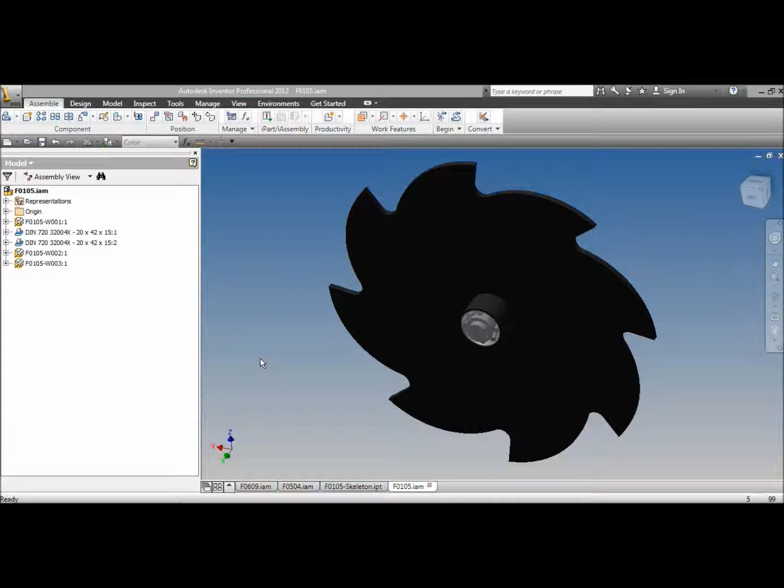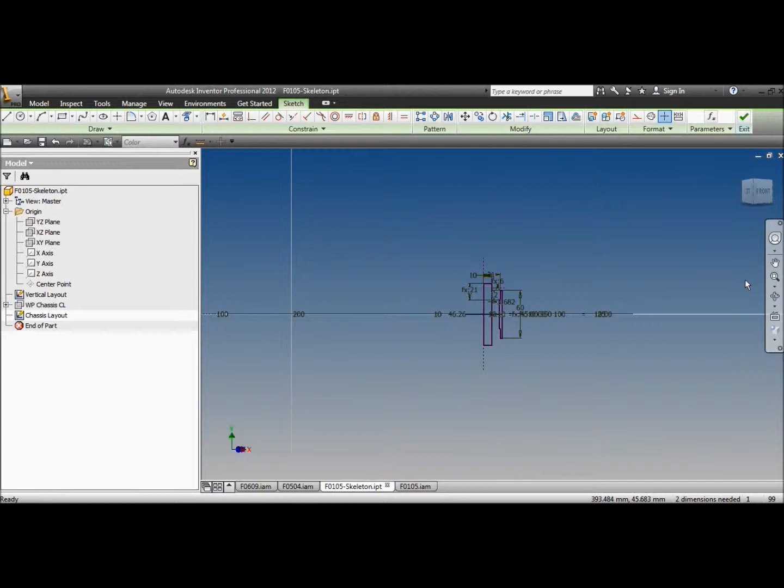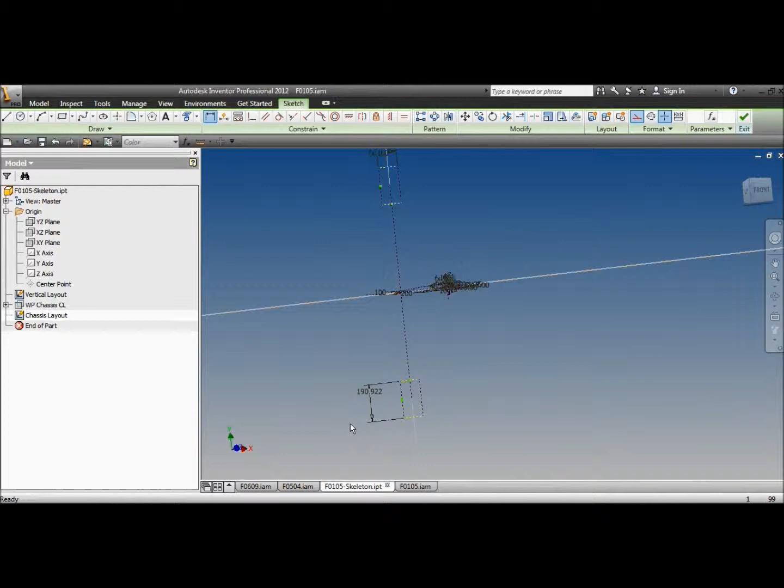There we go. Oh, let's make it 400 wide for the moment, just to see what happens. Right. 400 wide. What do I do next? I guess I draw some axles for the wheels.

Thinking, I'm thinking. Give me a minute. It's too early in the morning.

Yeah, that's an axle. Make those collinear so they're the same. Make the lengths the same. I use 12mm axles for the main wheels, because that's the center of the wheel. How far does that go through there? I've forgotten.

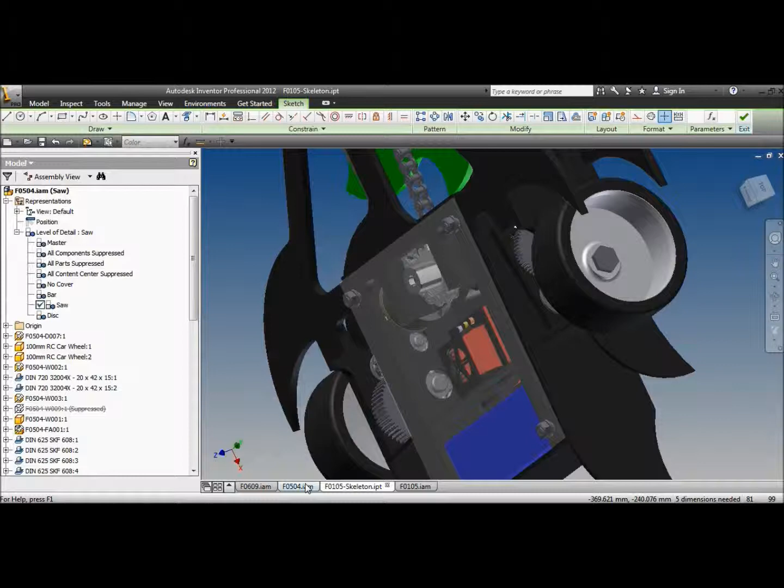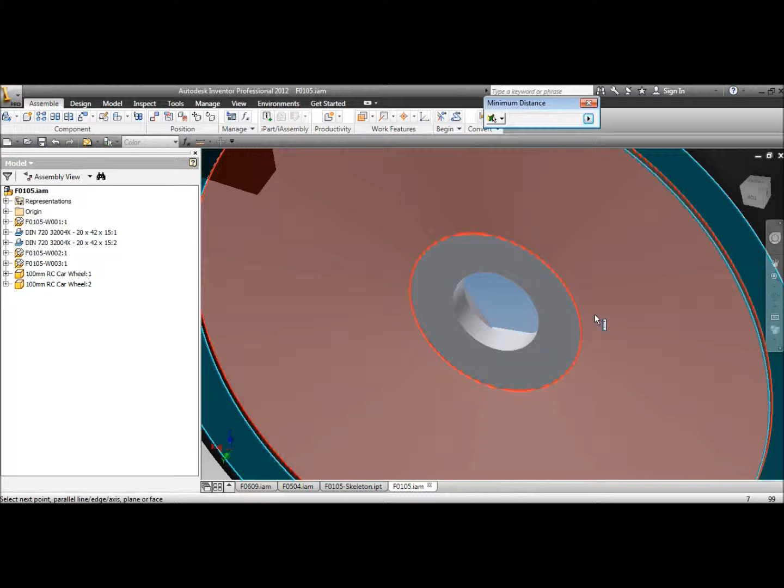Let's open up a wheel. Well, let's copy it into the model. Copy some wheels into our assembly. Paste. Yeah, whatever. Now the distance from the inside of the wheel to the inside of the hex is 8.5mm.

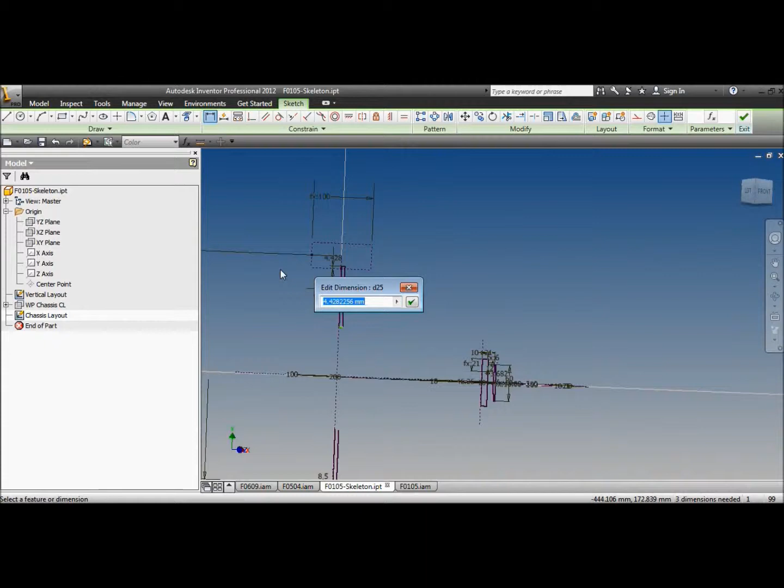I probably should set that as parameters so I stop doing it the hard way. But I don't think I will. I'll just keep doing it the hard way. I'm too lazy this morning. 8.5. So means from there forward in the construction line, how much wood on the other side? There forward on the construction line, that's the outside of the plate.

Just a minute, my leg's itchy, I've got to scratch my leg. Just to make this video more interesting.

There we go. Anyway, from there to there, put 3mm clearance between the wheel and the outside of the plate. And then here, just draw some random lines. That's the inside of the plate, which is primary plate thickness. There we go.

And then we have another plate over on the other side. We'll do it the same way we did over there. Make that line there equal to that line so they're both primary plate thickness thick. We'll make the axle stick out 3mm beyond, just for the fun of it.

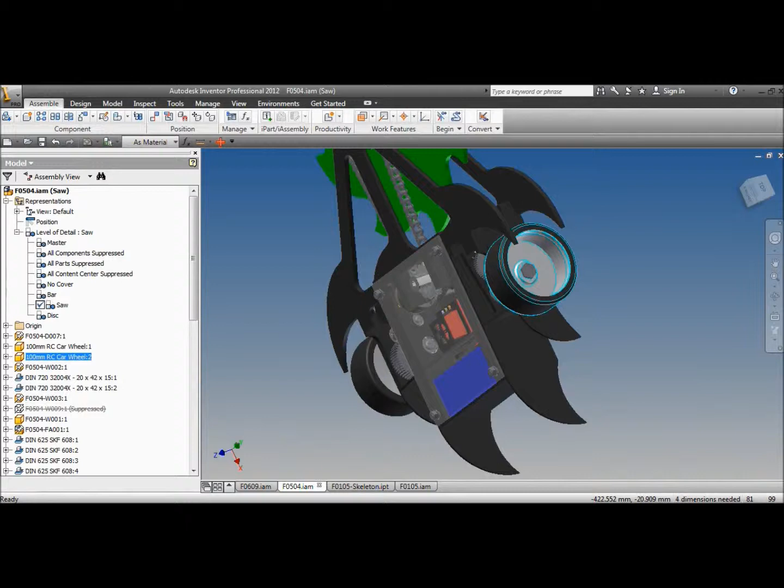Now the distance between these two plates is the width of the gears. So how big are my gears? We've got to figure out my gears. Now we could just measure them from here and use the same gears. Or there's the internet. Hello internet. This is the website I was looking at buying gears from. So if I just select a random one.

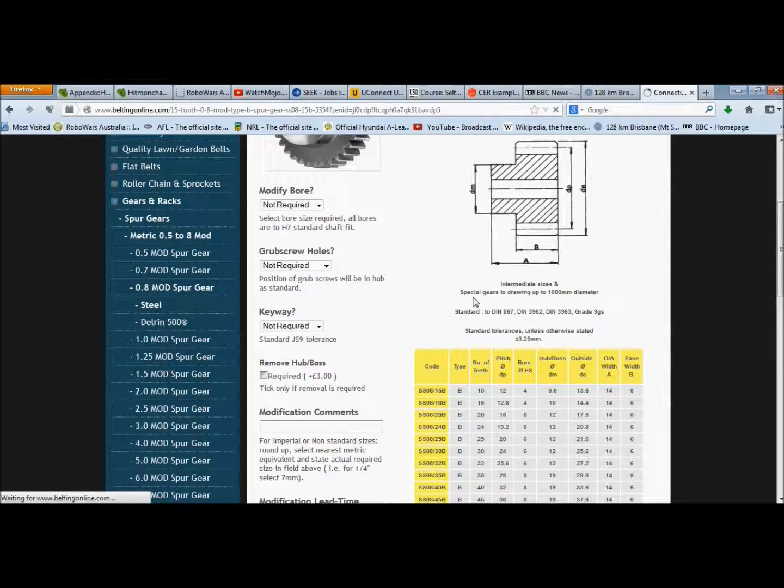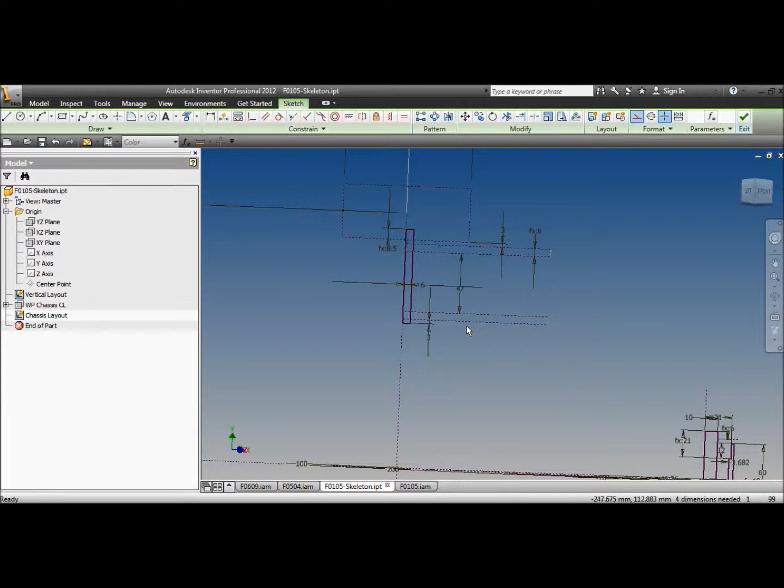This is a mod 0.8 gear. They say that their mod 0.8 gears are 14mm wide with a face width of 6mm. And their mod 1 gears, steel gears, are 25mm wide. Okay, go to Inventor, back to my sketch, this dimension was 16 plus 25 plus, we'll put 3 millimeters on each side of the gears. 47 millimeters. A bit bigger than what I had before. Oh well.

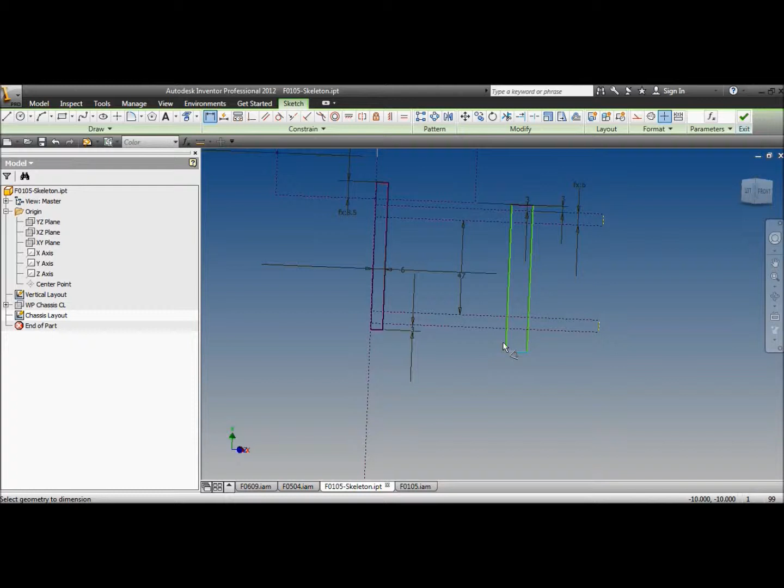So what we do now is we need another axle for the front gears. So we'll do another rectangle, and we'll do one over here. Make the axle stick 3 millimeters wide and 3 millimeters wide on this side as well. And the axle has a diameter of 8 millimeters. And from center to center, we'll have to figure out what gear reduction I'm using.

Now the overall gear reduction is 10 to 1. So we need 2-stage gear reduction. 10 to 1 is 4 to 1 and 2.5 to 1. We'll make the first stage 4 to 1 with the mod 0.8 gears, and the second stage 2.5 to 1 with the mod 1 gears. So for a 2.5 to 1, I'm just going to copy this. What gears should I use? 2.5 to 1.

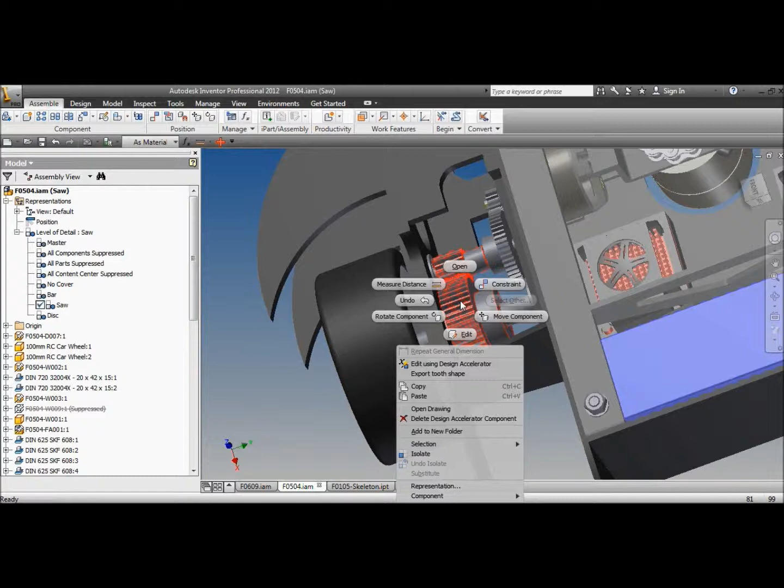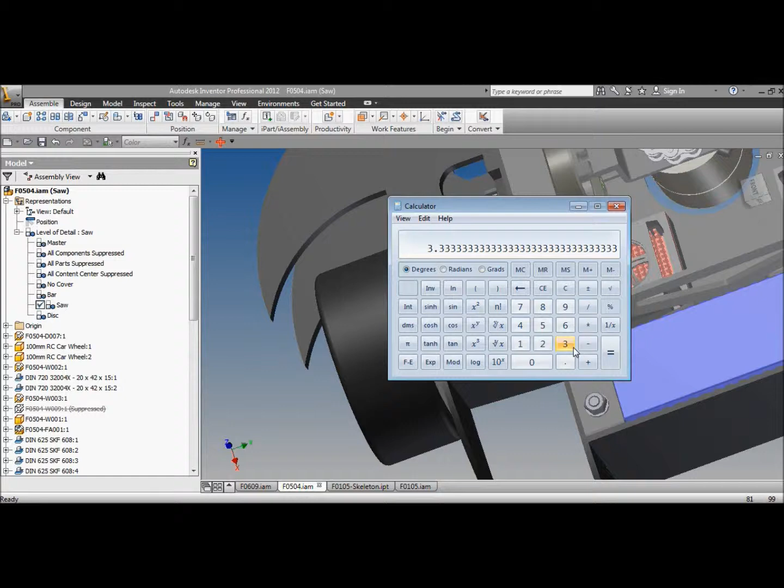I'm going to cheat and just copy the old robot. 50 to 15. Okay. What's 50 to 15? 50 divided by 15. That's 3 to 1. I must have gone 3.333 and 3.333. Huh. Do it the smart way. Okay. 15, 50.

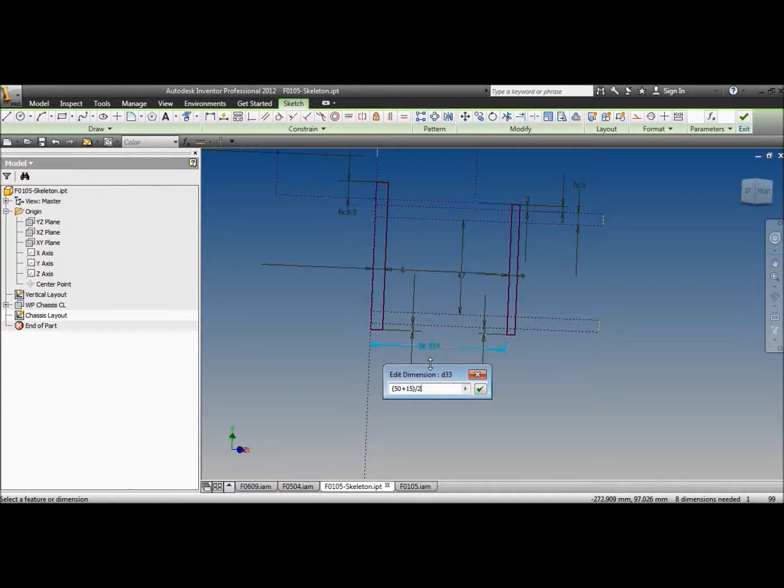So, mod 1 is 50 teeth plus 15, put them in brackets, divided by 2. And we don't need to do anything else because mod 1 you just do times 1. So the center of the gears is the number of teeth of both gears divided by 2.

There's 32.5 millimeters between the two. Woohoo! Now what else am I going to do? Actually, I'm going to delete this 3. I'm going to make those collinear, so the ends of the axles are the same. And all I have to do is make that one there collinear, that side there to there collinear, one there to there collinear, and make everything equal on both sides. So that's my axles on both sides.

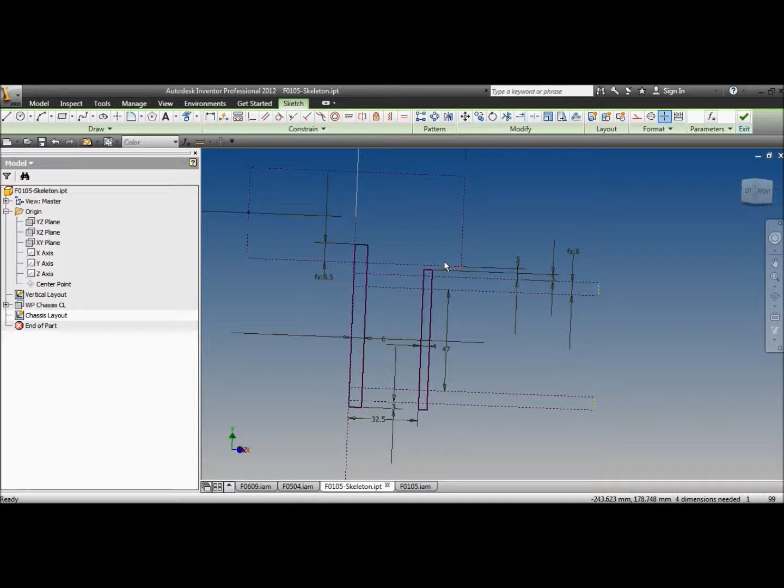And I'm not overly happy. That gear there looks like it's going to rub. I'm going to make 5 mil. There we go. My wheels are 5 mil outside. That's 3 mil. That way now the axle's not going to rub against the wheel. And they should be the location of my drive axles. Looks alright to me so far.

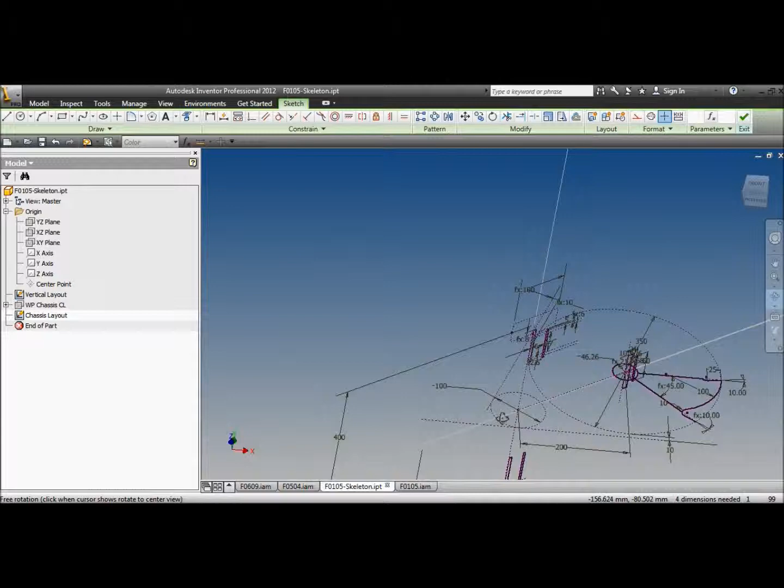You put the motor in front, put the motor here somewhere, in here. Leaves the back open, you can put the speed controllers at the back then. No, I'll not do that. Just keep it all level at the moment. So, I'm going to go parameters, link, done, draw a rectangle, construction rectangle, put a center line in it, and that is my motor.

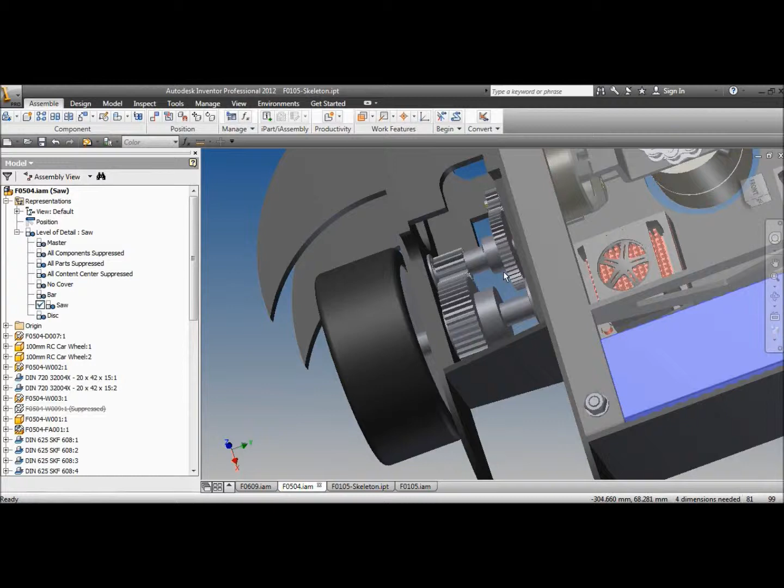We'll put a length on it. Is motor length, where's motor length? Motor length. And motor OD, can OD, there we go. From the center of the motor to the center of the axle depends how many teeth I'm using. Look at this one again. Edit the design. It says I did a 50 to 15 again. I'm so boring.

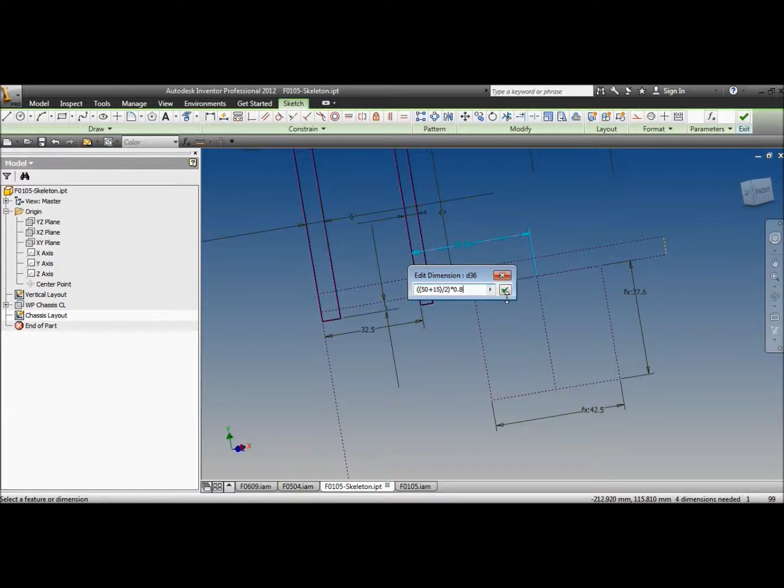So the centers here is bracket bracket 50 plus 15 divided by 2. Bracket around all of that. Because I'm going to be using mod 0.8 gears for this stage, we do times 0.8. Done. Woohoo. And that's the center line of my motor. So that's where my motor would go.

And I'm just going to draw a construction line from there to there, the outside of the weapon axle to the drive line. There's those two plates. That's my weapon support plates. So that's where that would go. We've got plenty of clearance there. Looks alright. Kinda boring, but alright. What am I going to do next?

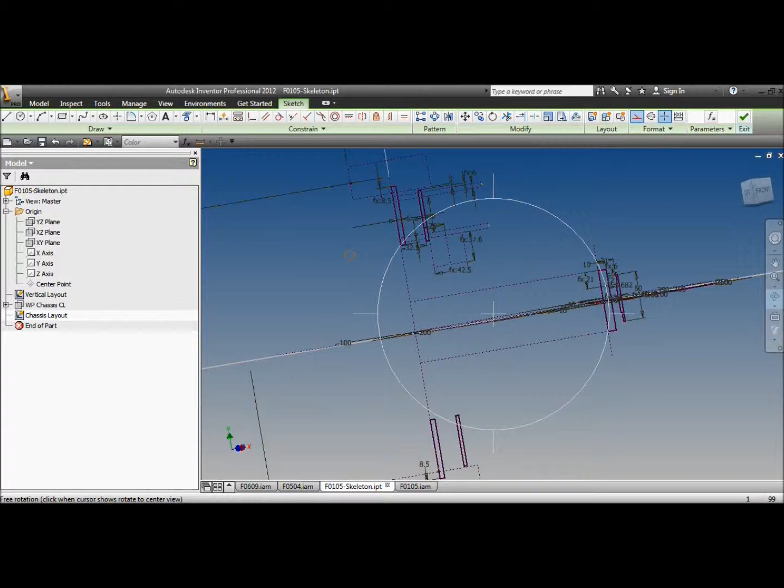Gee, I might just explain a bit more about the gears while I'm here. If I go back to the internets, go back to mod 0.8, back to steel, select a size, 15, so that's a 15 tooth gear. Scroll down to this table. Actually this one here, we can modify the bore to 5mm. And the NTM 4238s have a 5mm axle. So that's why I chose the mod 0.8 for that.

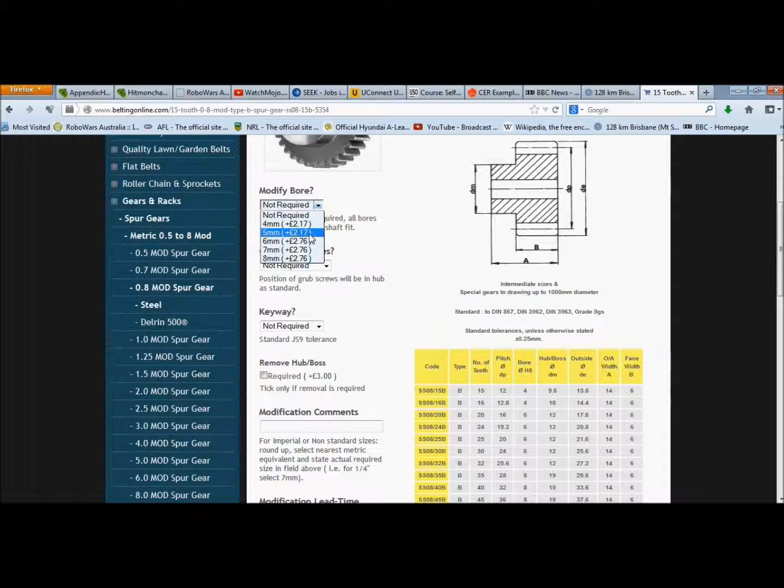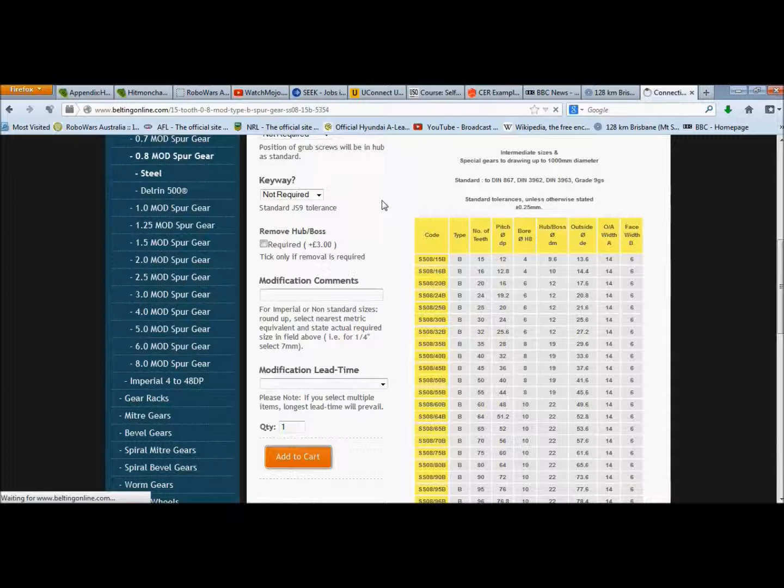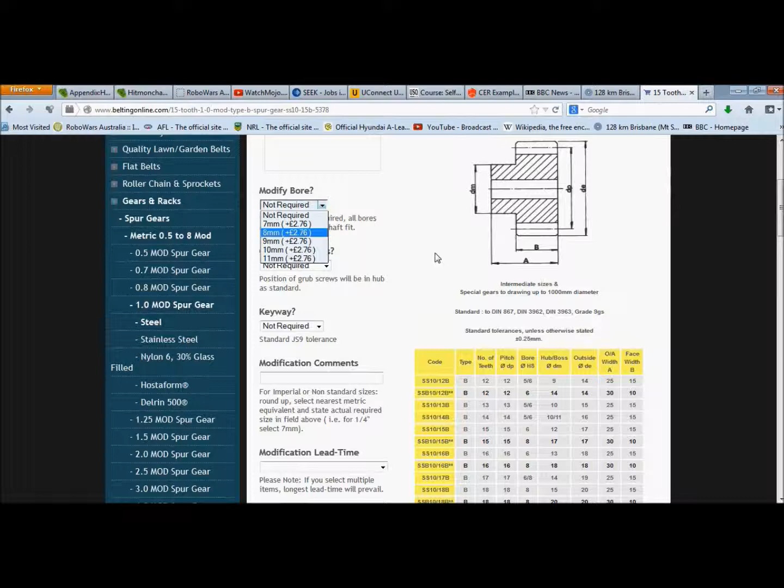And then the 50 tooth gear, where are you? 50 tooth, here we go. It's got an 8mm bore as standard. So we go back to mod 1, steel. The 15 tooth gear, here we go. You can get it with an 8mm bore, so that way the big gear, 50 tooth mod 0.8 gear, that's the same bore as the little mod 1, and then the big fella, 50 tooth mod 1, we can get that with a 12mm bore.

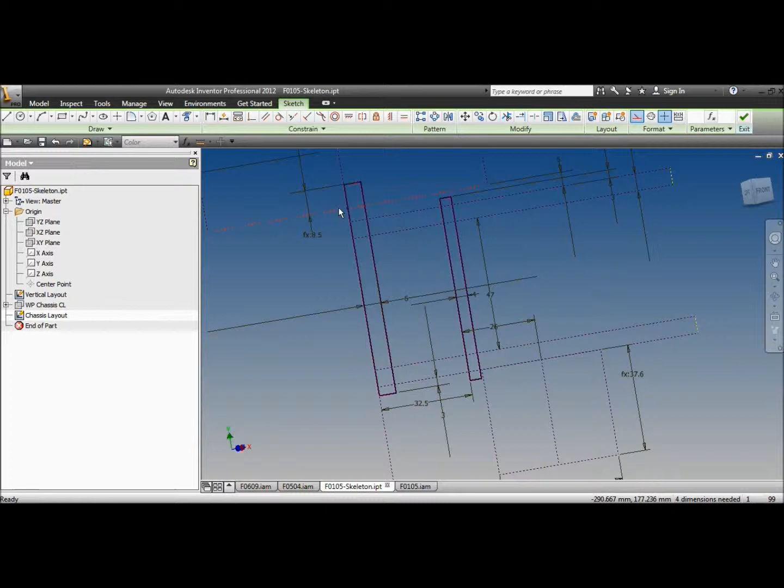There we go, 12mm. So that way I can just use a 12mm bolt for my rear axle and an 8mm bolt for my front axle, and then just put ball bearings on each side. So that way, with the 12mm bolt, I can grind down the hex head of the bolt to fit inside the wheel and captive the wheel, which is what I've done on my previous little test robot. And that makes a nice easy gearbox. And with the water jet cut plates on each side, everything will line up perfectly, well, not 100% perfectly, but good enough.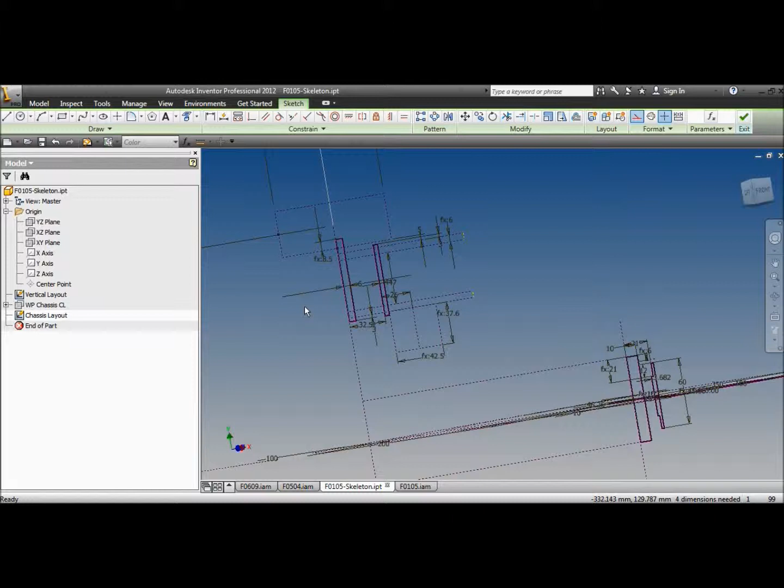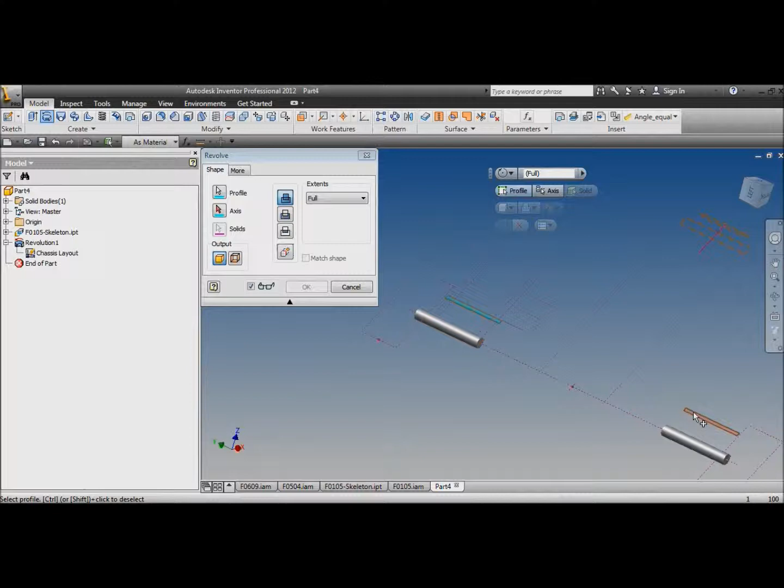And I think I might have run out of video. So, yeah, that's my 15 minutes. All I've done is figure out the layout of my drive. And actually I might just make my axles while I'm here. There we go. It looks a little bit more like a robot for some reason. Yeah. So we've got the weapon layout done and the drive layout done. Then we just need to fill in the rest next time.